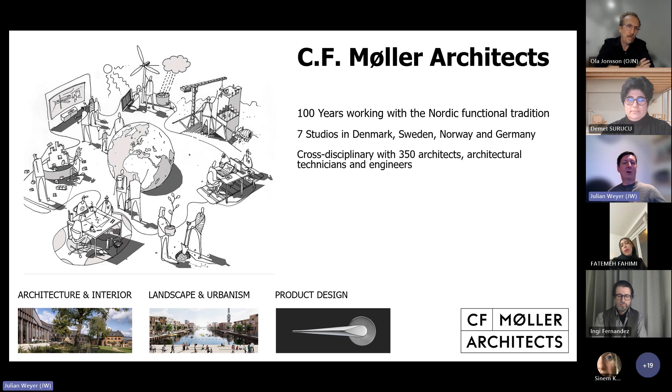One of the important points is that up until 60 or 70 years ago, we mostly built healthy buildings, and today we are transforming a lot of those buildings. They're not being demolished, they're being transformed. They can live on. And when they're transformed and reused, you find they are quite easy to work with. Post-war, new building materials started emerging and experimentation took place, which led to buildings that are today perhaps a bit more problematic. That goes hand in hand with the discussion of embodied carbon, which we'll come to in a minute, and that's been part of driving timber architecture emerging.

For our 100 years anniversary, we made a number of things. We made a movie, which you can see online, but we also made these centennial numbers, which pretty much tell the story from bricks in the 1920s, 30s and 40s to concrete in the post-war period, and today moving on into the timber revolution. A big part of that has been the fact that we work across Scandinavia. Originally a Danish office, we are now a pan-Scandinavian office, and that makes a big difference in where the influences of the architecture come from. Ola will get into that as well.

Looking back shortly at what happened in the Nordic countries: in the 1970s there was the oil crisis, which for the first time brought energy efficiency to the forefront in architecture. Then it was all about heating, so saving heating energy was the big thing. We came from an absurdly high level, looking at it today, in terms of how much energy buildings were using, but that was never put into question before. Then in the 2000s, there was a big focus on operational energy, especially electrical energy in buildings, and optimizing that.

And a lot of work was done in pushing that, squeezing the operational energy balance of buildings, and also really the heat savings that were able to achieve with the kind of approach that you find in passive house architecture, for instance. So all of that was embodied in building regulations in the Scandinavian countries throughout the 2000s. And that means that in a future scenario, so the 2020 scenario, we no longer have that much focus on the operational energy like the heating and the electricals, because that has been optimized to a degree where the last little percent of saving maybe doesn't make much sense.

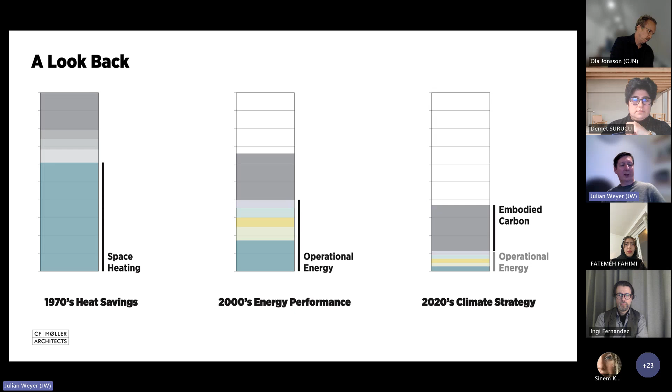Rather, what makes a difference now is this block which has just been sliding down the scale, which is the embodied carbon in the buildings. It used to be a smaller part compared to the energy that was used in buildings, but now it actually is the bigger part. So this is where our focus has shifted to. And if we look at that in the typical multi-story buildings, you'd see that the embodied carbon is way bigger than the actual energy use. And if we perform tweaks on the energy use, which we of course still do, we still try to optimize in every which way we can, it doesn't really bring the kind of savings that focusing on the embodied carbon does.

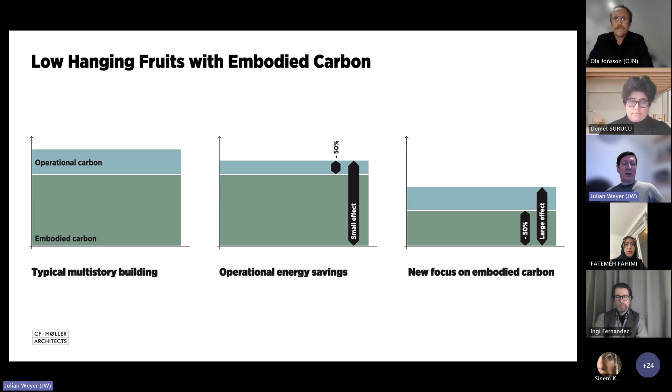So as a background, this is the logic which has been driving, for instance, the use of biogenic materials in architecture, especially in the Nordics. And this had to do with the fact also that we come from a tradition of building where prefabrication has played a big role for many, many years. And it's mentally, at least, an easy shift to go from prefabricated concrete panels to timber panels, for instance. Of course, technically, it's not always the same, but it's close at hand to make this transition because we're used to thinking in these modular ways.

And that leads to the Swedish perspective, because when this whole thing started, it was very much Sweden and Norway and Finland, the Nordic countries that have a big amount of forestry, which were drivers in the first push for change in this. And this resulted, for instance, in research collaborations, which Ola can talk more about, where we went into partnership with other companies and institutions and universities as well in trying to develop these concepts to be able to bring them to the market.

Yeah, shortly, Sweden has a long tradition of building in timber, and I'll get back to that as well. But the research project actually started out with a need for a change in how to use our timber in Sweden, and the union for timber was looking for new challenges and new jobs, and then that set off a discussion, and that ended up in a research project with Vinnova, which is a finance center for research, and Linnaeus University revised the academic level of it. So that's the research project that we finished a few years ago.

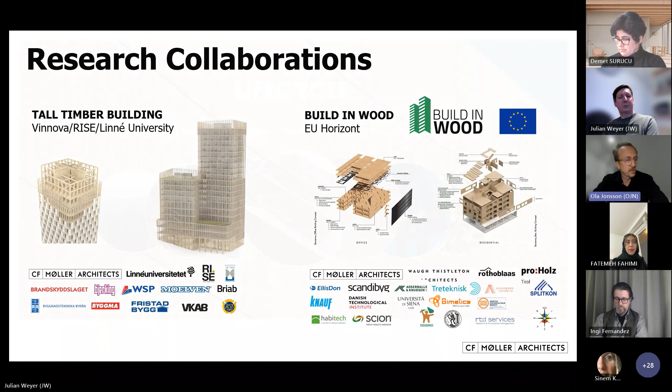At the moment, we're involved in another much larger research project together with other colleagues around Europe, and it has quite a technical aspect to it, and it's financed by the European Union's Horizon. It's a 10 million euro research project, so it will be presented quite soon, I think, at the end of that. But the purpose was to find common ways of using the Eurocodes to build all over Europe.

But basically, the most important thing about building in timber, in my perspective, has been that it has a life cycle. It's a circular means of building, especially in Sweden, where we have a large degree of woods. You take the timber and you build housing or offices or whatever you want to build, and try to build them with great quality so that they will sustain over a long time, with the embodied carbon. And then after hundreds of years, hopefully, we can transform it into a new building type.

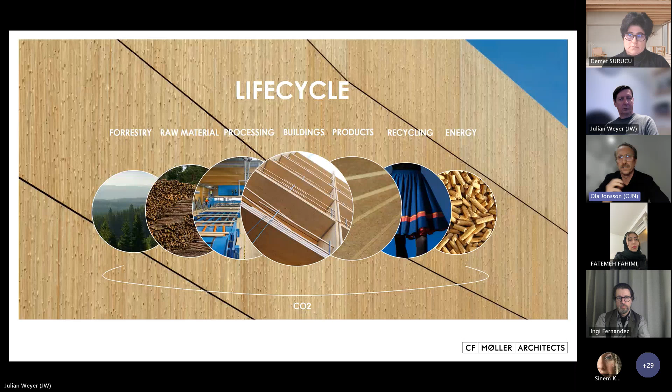We can take it apart and make new buildings, or we can make simple building materials, or other organic materials like textiles or anything else. And then in the end, it will be either burned or go back to biomass. And that just says that the carbon that the woods take from the atmosphere is borrowed and then handed back to the atmosphere again. So it's the same carbon that circulates around instead of creating new. So that was, for me, the main reason to work like this.

Sweden or Scandinavia, depending on how you see it, consists of about 70% forest, and a great deal of that is sustainable forestry, which means if you take down a tree, you replace it with two or three new ones. But there's a lot of research and science connected to really doing it in a sustainable way, and it's developing. You can take the next one.

And engineered wood or timber is many different things. CLT is the most commonly talked about today, but there are so many different versions of it that we work with in different timber hybrids, and it just has some of the best qualities. Of course there is the lightweight and the environmental part, but it's a really easy, industrial material to work with. You can get really high precision and a linear building process. We can continue. We have so many pictures, so I have to go really fast.

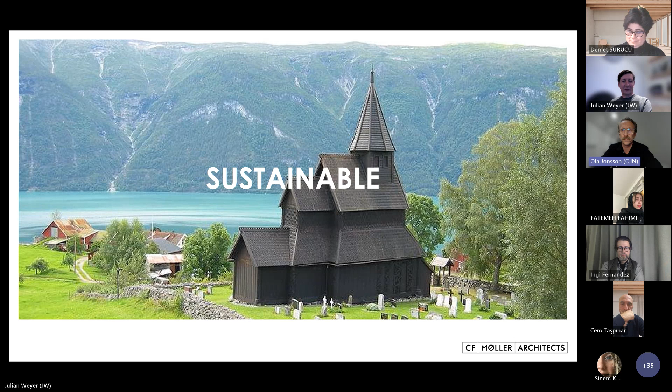Sometimes we have critics that say timber is not long lasting, but we have proof in Scandinavia and Turkey and other countries. If you just do it in the right way, you can actually have buildings that stay for a very long time. This is a stavkirke, a stave church in Norway. It's been around since the 1100s, and it's still standing.

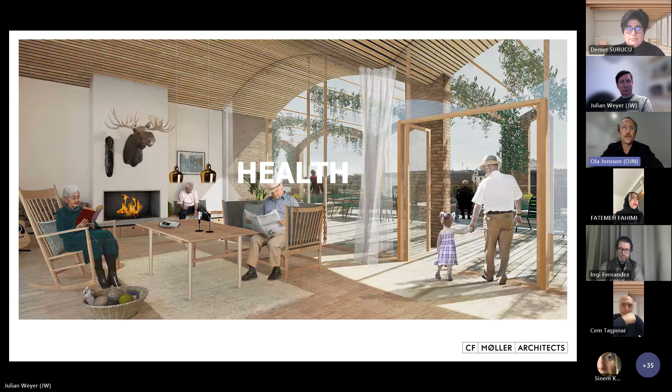One of the things that came up, not from the beginning: when I started 15 years ago, there was not much discussion about health, but evidence-based research now shows that it has a great effect on humans, both including it in the structure, which affects the climate and the acoustics and so on, but also visually. There are several reports that show that, for example, in hospitals or elderly homes, people become healthier quickly compared to other types of buildings. And I think that's one of the main things we try to work with in all our design.

I think we have matured a bit as well. We started out talking a lot about buildings, this building and this building, but the main concept is to change our cities from producing carbon dioxide to actually absorbing carbon dioxide, and so when we brag about making tall buildings, that's in reality not so interesting. It's about the critical mass of our cities and how we plan them. Yeah.

And this is my little slogan, but in general, I work more and more with hybrid buildings, and the best material is not timber. The best material is the one that we're not using. So we have really advanced simulation and digital tools today that can actually show evidence of the smartest way of making our buildings. And it's not always timber. Sometimes it's timber-concrete or timber-steel. But the base, the beginning of the talk, is always how much timber we can use percentage-wise.

And I throw in a little quiz. I used this in a presentation recently in Sweden, so this is a bit different. But do you know what the largest timber building in Sweden is? So this is a question for you guys. Have you ever been to Stockholm? No. Yes, but yeah. You don't know the answer? Yeah.

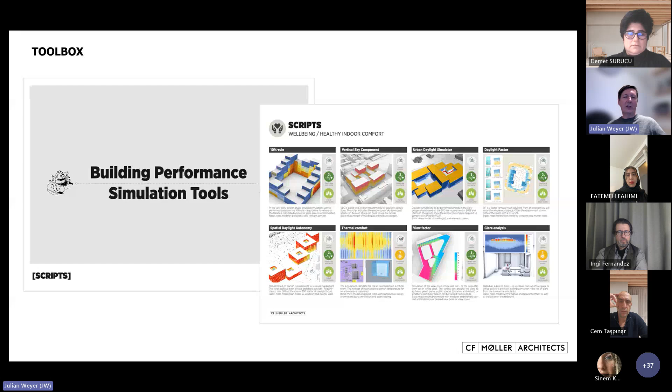And there's been some recent developments, which I'll come into in a minute, which are quite interesting in pushing these agendas. We have over the years developed particular scripts and tools which are used for initial assessment in the sketching phase of daylight, of microclimate, of overheating, all of these different parameters that can be studied in models from an early stage on. But what happens now is that LCA comes to the forefront. So life cycle analysis is now part of mandatory building regulation requirements.

And this is an interesting change, and I think the Nordic countries are the first to have made this move. I would expect this to happen in more countries over the years, but of course the question is how fast will it be? So in Sweden, Norway, and Denmark, we now have climate regulations as part of our building code, and that means that there are caps on the embodied carbon. You can only use so much. And in Denmark, we did it in the same way as it was done 20 years ago when it was about energy savings in operational energy.

We started out with a building code which was tightened every 2 years and stepped down. So the top curve would show you what would be the mandatory requirements coming for the next year. So for 25, 27, and 29, you'd have tightening of building codes. Earlier on, it was operational energy. Now it is embodied carbon. So these numbers here, 12 down to 7.5, are kilograms of CO2 equivalent per square meter per year.

Underneath that, the lighter line is the voluntary emission class, which was always an offer to say, let's do an experimental emission class where more ambitious builders, architects and designers can try and meet tightened regulations. Now, what we know from the 2000s, when it was operational energy, is that the plan is always to, at some point, skip the top line and go to the bottom line. As soon as it's been proven by the first projects that you can achieve these kinds of savings, the mandatory top line actually moves down and the voluntary class becomes the mandatory class.

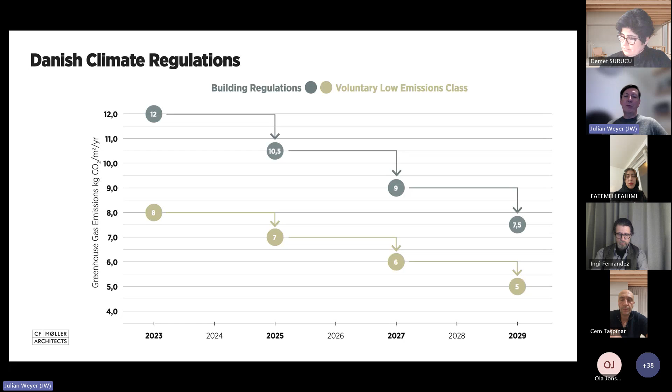And this happened already before the first 2 years were gone. We now actually only have the lower line as building regulations for the future. So that means that we are looking at a quite ambitious transition. We can't really build as usual anymore. So classical business as usual is out of the question. We now have to think about materiality as a key forefront. And this goes together with the whole EU taxonomy, which also plays a role in this. I'm not going into this in detail, but it's certainly something that affects the way that we build.

So first off, we've used the LCA data we have to create a carbon construction catalog, really, which is a base that we can use when we design buildings. We have different build-ups and wall typologies, etc., and we know what the LCA data are for each one, because we have to make these informed decisions very, very early.

And we've also developed scripts, because with this kind of graphic, you usually see that together with BIM or other complex project management where you say, well, in the beginning, there's a large possibility for change because you're at an idea stage. And as soon as the idea becomes more and more concrete, the window for change becomes smaller. And in the end, change is detrimental in a project which is already in the advanced stages. So that becomes tremendously costly.

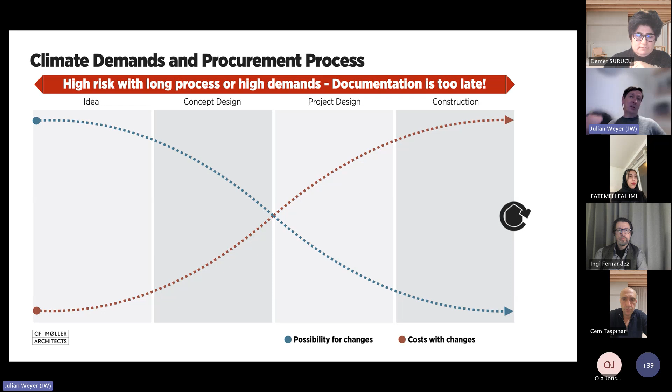Now, the problem is, as I just showed you, we project carbon values into the future. So if you want to make a building application in 2 or 3 years' time, it's not necessarily the same values as today. So we have to have tools that can tell us continuously throughout the design process, where are we in terms of embodied carbon, and are we meeting the targets?

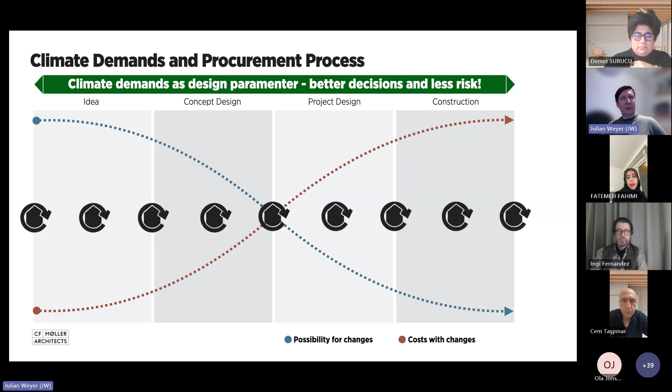Are we meeting the future targets that we have to amend to? So we need to look at these values and these data before we actually have a full building model that can give us that kind of info. So those projects I've worked on BIM, and of course, if we have a fully fitted out BIM model with all the data and the materiality, then you can make LCA calculations.

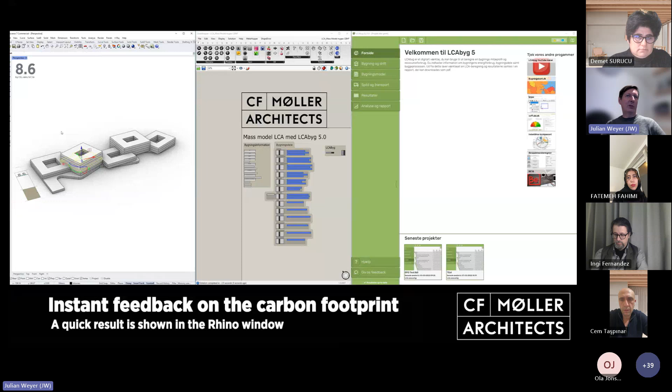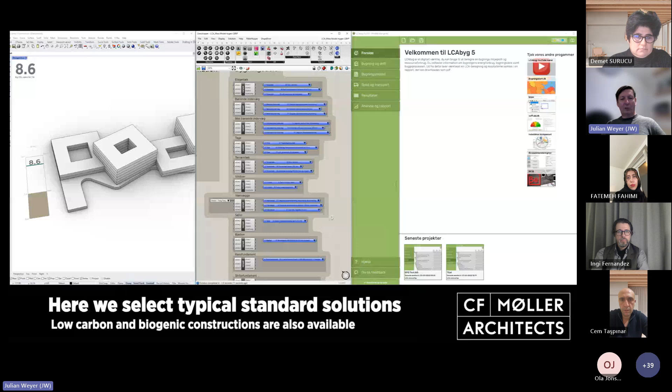But what about the early stages? So I show you here an example of what it looks like, the tool that we've developed that ties in together with the LCA calculation tools that are used to assess these values, and what that looks like on an early stage model. And this is a model that has absolutely no data on materials. So the only thing we can do is work with probabilities. So we can say, typical type of construction, what kind of LCA would that be? In this case here, you'd say standard solutions. That's what the contractor would use if we didn't make any particular specifications.

And then we can generate an early LCA file, and we can see, well, where do we end up down the line? If we have the building application in 3 years, are we still making the cut? Are we still meeting the requirements? And this data can be imported automatically, and the LCA calculation tool is an open source tool which is used all across the country and is available for everyone to use, based on a shared knowledge database. And when you see that you can't actually make the requirements, then we can change and implement more biogenic constructions. And this is really the key point.

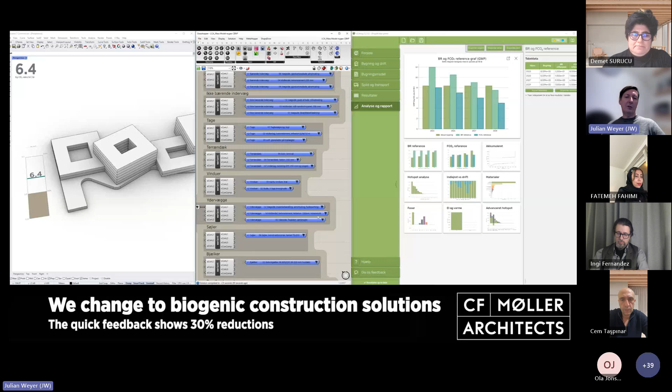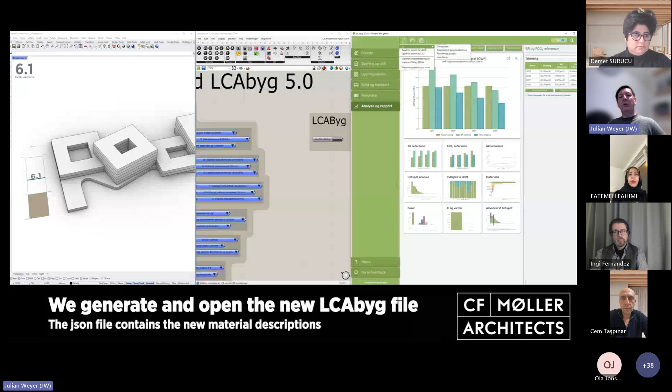We have this early on informed conversation with clients about if a particular building typology or size or dimensions, if we want to implement that into the future requirements, we need to look at the materiality just as an equal thing together with all the other parameters that we are looking at. And here, in this case, we can say, well, that kind of volumetry, that kind of building will actually achieve the LCA values and can keep below that if we use a certain amount of biogenic materials. So this is a way of approaching the fact that we don't really know yet in an early stage what we're going to do, but we still have to make assessments where we will end up.

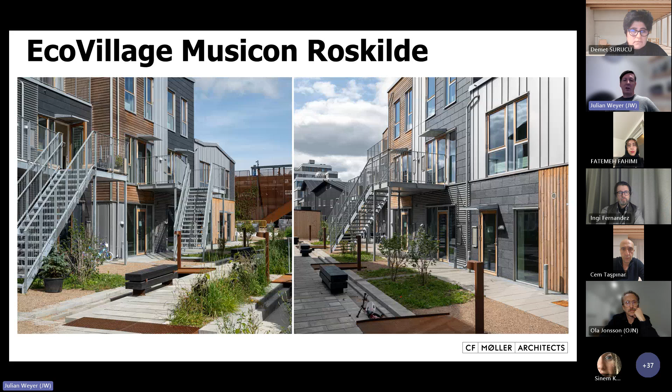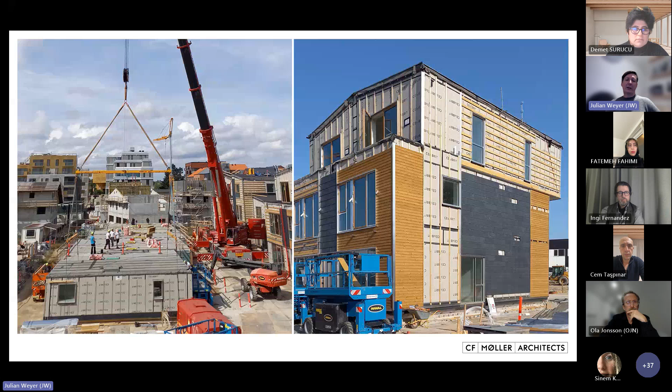And when you talk about these values that we are looking at in the future here, in 1 year, we are looking at 7 kilos CO2 equivalent per square meter per year, and that will drop further down to 5. What does that actually look like? And this is just an example here, a residential project, which is a completely modular timber construction, no elevators, no concrete, no cores in this building. It's made from entirely prefabricated modules, so it's put on site on a simple concrete slab, and otherwise everything else is either biogenic or recycled material or leftover materials.

And this is an aesthetic that I don't think every single building in Scandinavia will look like in the future, but this is certainly something you'd have to understand. This can go by about 6 kilos CO2 equivalent per square meter per year. So it's well within the range of permissible values, but it also shows you that if you were to make a basement here, or if we had a big lift core or something, already then we'd see issues with reaching the targets. And then there's the question, what comes beyond this?

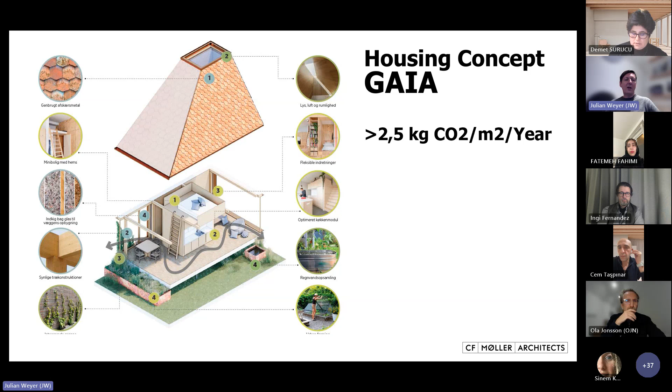So we did a competition/research project, which looked at the possibility of going way below those targets and going down to less than 2.5 kilos CO2 equivalent per square meter per year, something which is extremely ambitious in a building perspective. And the idea here was to say what kind of architecture, what kind of living could be an approach to reaching this. So again, it's probably not the solution for the future, and not everything's going to look like this, but it's an example of how much it actually takes to reach those targets.

And in this case, the target would be going from this roughly 4 times planetary boundaries consumption that we have today down to being within planetary boundaries, and then actually looking at what it takes to go below that and down to truly net zero. The definition of net zero is a very tricky issue, but if we want to say that you're 100% climate neutral, we need to go below the planetary boundaries.

So starting up at the top, business as usual is where we are today, and that's not even all bad in the Scandinavian countries. And then using timber construction, using bio-based materials and circular building and all the energy savings we're doing, we can push the envelope down from about 10 average kilograms of CO2 down to 2.3. So there we are technically within the boundaries, which is about 2.5 level.

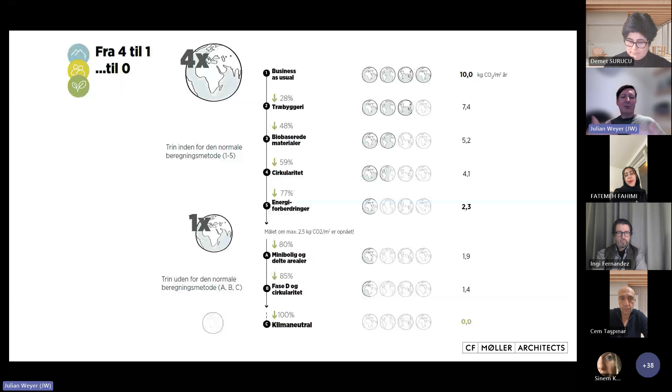Then if we want to go further down, we have to start looking at the areas and the volumes we're building, and we have to look at reusing our materials another way than, for instance, just burning timber. And that can then give us the opportunity of coming all the way down. So as an example here, this building system employed 78% bio-based materials, and the rest would be recycled materials, for instance, metal sheeting and that kind of thing, in order to get down to these super ambitious energy values.

But we were also looking at the fact that this was a housing concept. We're also looking at the fact that we need to actually make the units smaller. So Denmark, I think, has a record for most square meters per person in residential in the world, and that's just not sustainable in the long term. So we have to also look at that, use more shared areas and communal facilities, and then optimize area like that. So this is, again, an illustrational example of what it would take to get all the way down there.

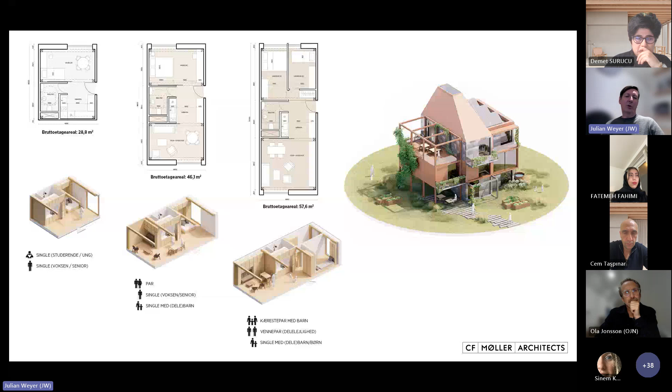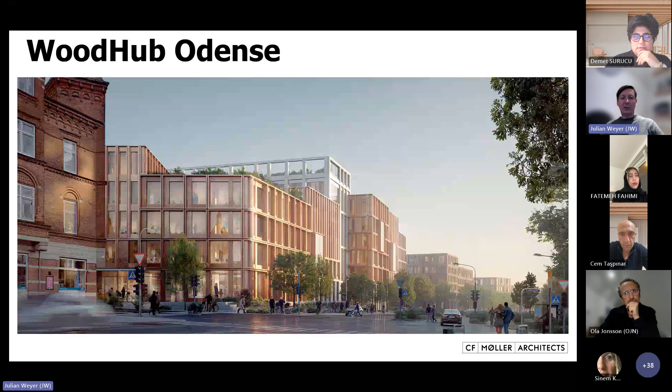But bringing that up into the big scale and showing how we can work with the larger buildings, that's where the timber construction comes into practical play. One project that we are working with right now, which is completing soon, is Denmark's really first large-scale timber building, a government office hub, which is built in the town of Odense, where the idea was already to work with a modular architecture which could adapt to timber construction, but also could adapt to the urban situation.

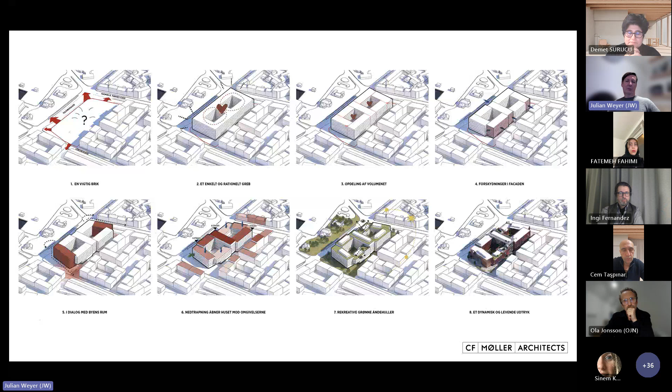So we had a whole series of diagrams here which show that we optimize the volume or create a large volume. In this case, it's a fairly efficient building, actually. It makes the most of the site and the space there. But the idea is to also work with it in such a way that it creates a good urban environment, a good microclimate, enhances the greenery on the site, and in the end still works for rationalized timber construction.

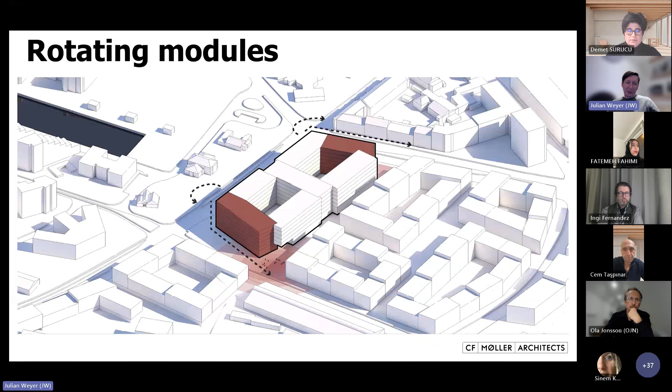So that means that we are looking at dividing the volumes, breaking down the scales, bringing in the edges of the city, adapting to the context in terms of heights, and then use the daylight to shade the building and use the roof terraces, activate the roofs, and then using architectural design of facades, different variations to blend in with the surroundings. So all of that becomes the language of the building here.

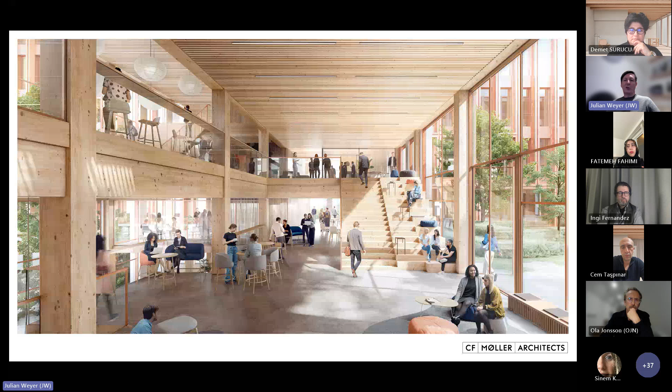And it's a project, as I say, about to complete, and it is a very simple structure in a way. It also has a high degree of timber compared to the modularity of other structures. It's a very, very simple construction, and it was part of the thinking here that because we also have to think beyond the use that the building has right now, we need to project where we're going to be in 50 years' time and how the building can be reused.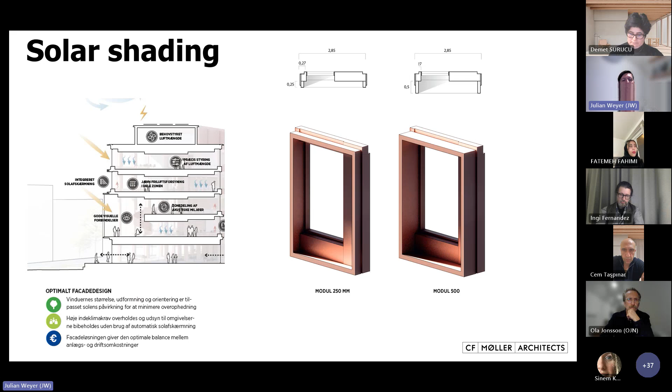So we have a simple passive design where solar shading is already integrated in the facade, so we can do without external sunscreens. And then we have very, very simple column and slab construction, which gives us a high degree of freedom when it comes to the use of the building in future perspectives, because there are no beams or downstands or upstands that limit the use. It's a very simple sort of shelf-like system, which means that we actually have a large range of adaptations.

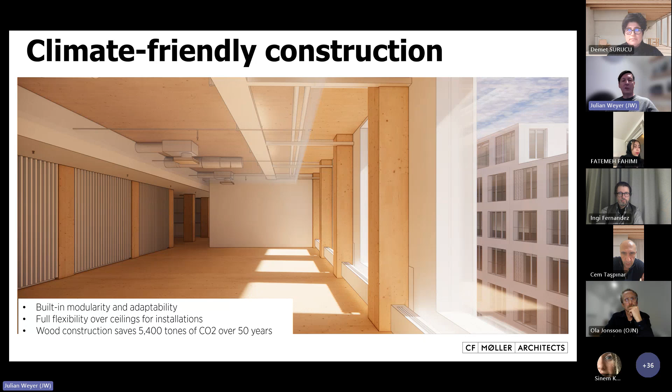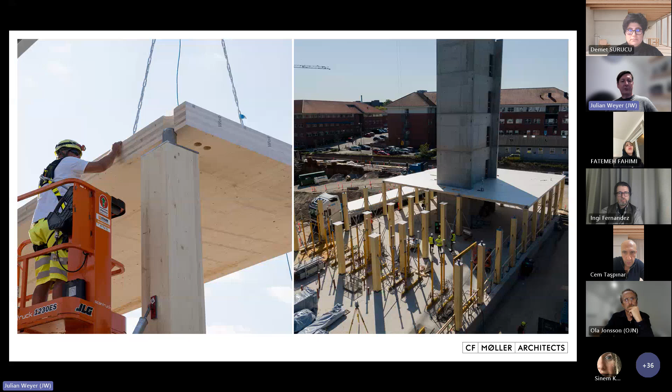It can be transformed in future scenarios, and it has a high flexibility in terms of what kind of installations, whether it needs ventilation, for instance, or not. All of this is adaptable. And on site, it's really a simple construction as well. As you can see, it's timber columns, timber slabs, and then only point-wise concrete cores, which is the hybrid component here. And that's then covered in a recycled aluminum facade with this solar shading efficiency.

And a lot of actually quite beautiful details can come out of that, and the whole timber atmosphere on the inside, as Ola was talking about, is certainly also something to do with the healthiness of the work environment.

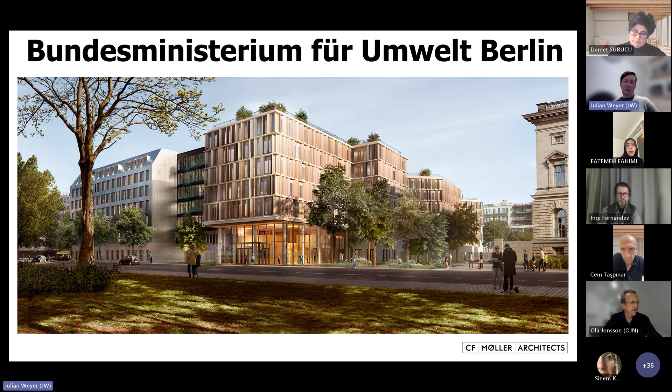And one step further is a project we're doing in Berlin, which is the Ministry for the Environment, the German Ministry for the Environment. It's just sitting right next to the Parliament of Berlin, and a tricky site and a tricky building because it's supposed to be a showcase for circular and low-tech construction in Germany.

A sustainable approach. And what we found is that we are in an urban environment where if we want low tech, which means in this case no ventilation system in the offices, just natural ventilation by opening the windows, first off, we have to look at what kind of urban environment is on the outside. And we find that it's not very green. So the idea was first to create a green island. So if you actually open your window, it's into a pleasant microclimate and not a busy big city.

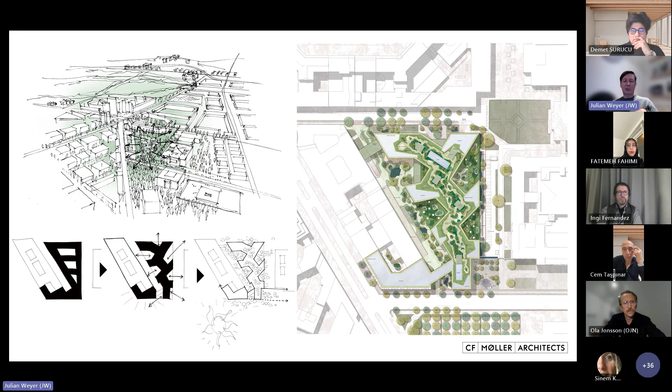And the next thing being that if we want to make a low-tech building, we can't do an introvert building. So we can't have something which is closed in on itself. We need something that is extrovert and outward looking. And this ended up in this kind of strange structure, which looks almost like a tree, which is unintentional in terms of design, but it works brilliantly because this is open to all sides for daylight and for natural airflow.

And then combine that with a building where the facades change depending on the amount of sunlight they get. So higher up, actually, the facade openings are smaller, lower down, they grow larger. So it's a very sort of organic expression of the situation the building is in.

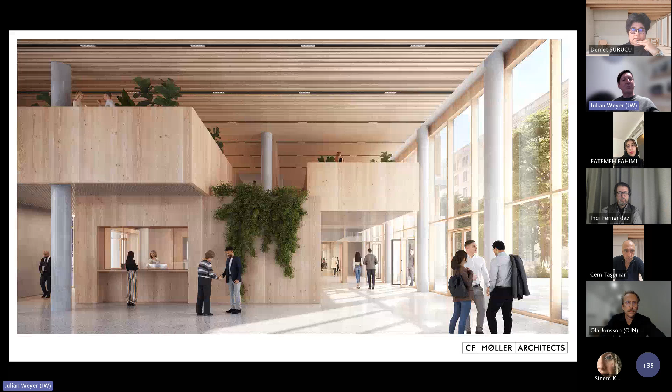And this is then combined with thousands of singular offices in there, plus some communal office space, but then also particular spaces like lobbies, foyers, exhibition rooms, etc., which make up a special atmosphere and where we use the timber construction also to, in this case, create a dramatic ceiling in a lecture hall or have a vertical atrium that bisects the building. All of this is something where the timber comes into play.

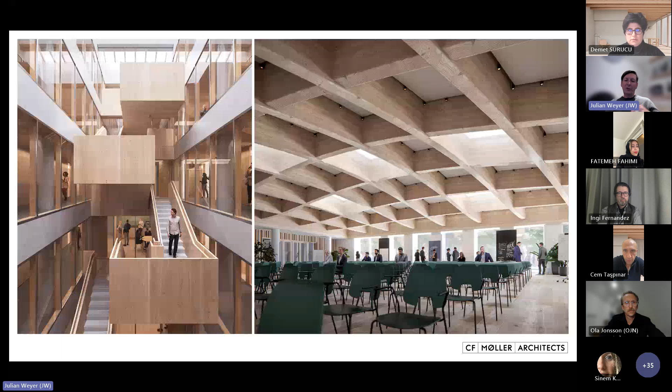And then we have to project the climate data. So Berlin, which today already has pretty hot summers, in the future will have a climate which is more akin to Rome or Istanbul probably. And therefore, we also have to look at the projections in the future scenario. And again, there's no cooling, there's no air conditioning, there's no ventilation here.

So what we rely on is that we have a simple ceiling fan, and then we use clay in the building. So clay as a material for partition walls, for instance, means that we have a 2-degree lower room temperature because of the retarding quality of the clay in terms of adaptation or change in room temperature. We use the night cooling, so simply opening the window and leaving it open at night will cool down the building, and the clay will postpone the reheating. So it's sort of small tweaks which make that difference.

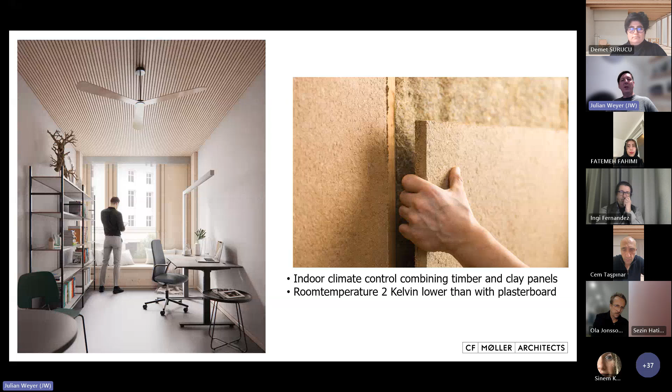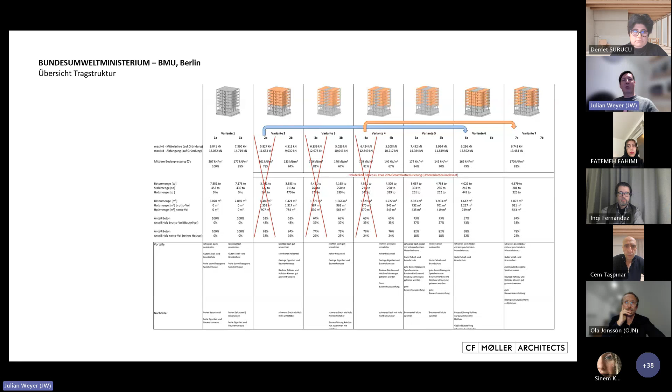Here, for instance, we wanted a lot of green on the roof, and heavy loads from that mean that we have a concrete core and then we have timber slabs on the outside. And again, with the timber slabs, we also looked at all sorts of different variations and looked at their different build-ups and always compared that to a standard concrete construction, as any contractor would do it.

And then we looked at the individual quality of the timber slabs and found that actually one model which worked quite well is one that is very akin to, as I said earlier, we're looking back to buildings which are now 80 to 90 years old and are super healthy buildings.

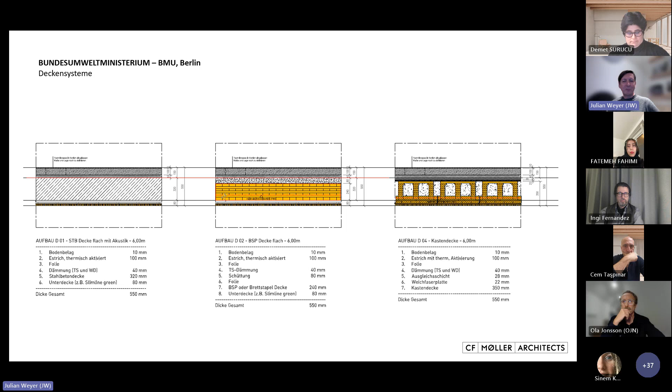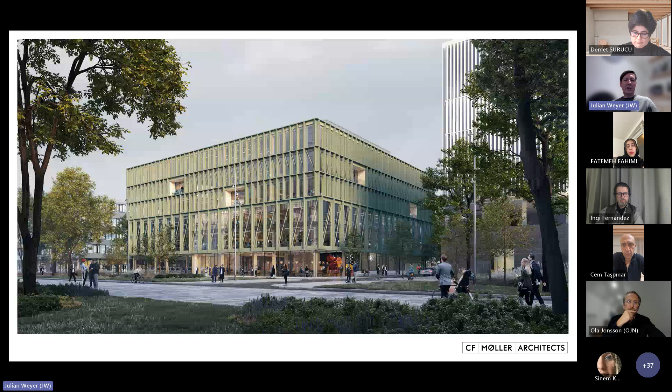And another project that we're doing right now in Germany, also completing, is in Munich, a large-scale office building there, which is a market rental building. And therefore, this is divided into smaller units. It's derived in very much the same logic as the project I showed you in Odense, so that we have a number of buildings tied together by an atrium on the inside and a simple, efficient floor plan. And then these adaptations to context, which mean that it makes sense in its overall setting.

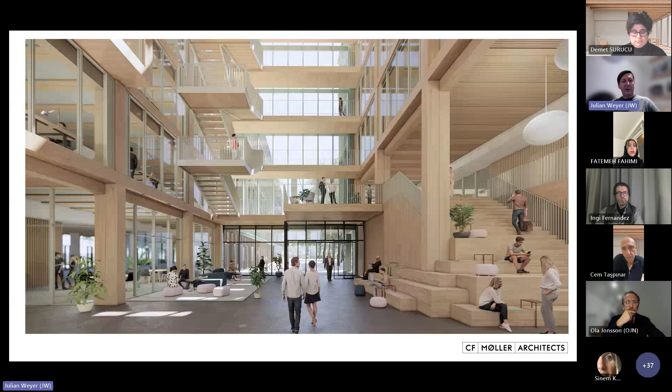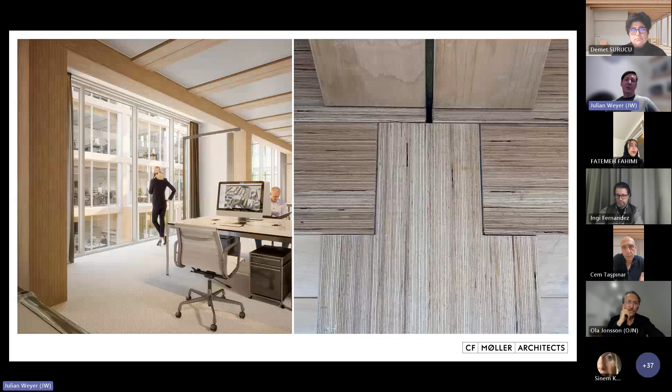And here we're looking at using the timber in a very visible way on the inside to have a really true timber atmosphere, because it has a fantastic value, as you heard. It creates something special in terms of the feel and look of the building. And here on the left is a render of the offices, and on the right that's actually a shot from the mock-ups that were done on the building site.

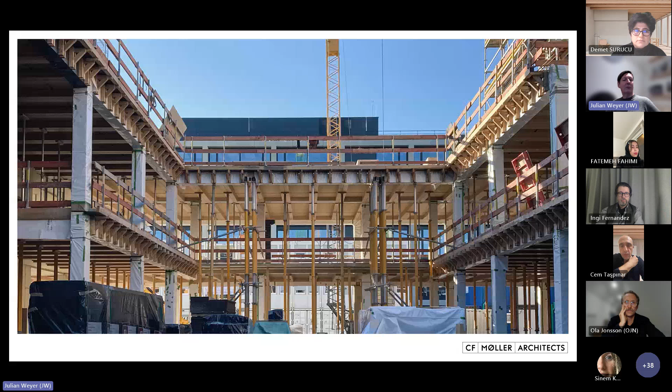Here we are using beech wood. So this is not a CLT, but basically plywood of beech, which has a high tensile strength. And therefore, we can do a beam construction here, which has much larger spans and different properties. And we looked again at optimizing the different slabs in terms of having these larger spans, creating more freedom in the floor plate. And this is what it looks like in construction. You can already see that there's this ribbed structure underneath the slab here and relatively few columns, long spans.

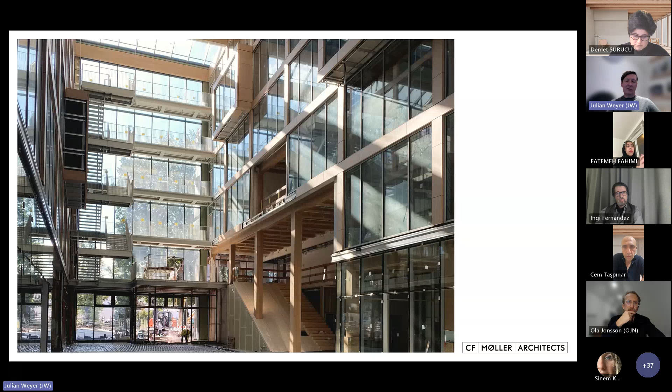And in detail, how this feels, and again, it will be visible. So it becomes part of the interior design. And this is a very recent image from the construction site, it'll be completing early next year, where you can see the timber on the inside. There'll be this large sitting stairs coming down. And so it's going to be quite a special atmosphere, this building.

And the last project in Germany that we're working on right now as well, also under construction, is a school. And it's interesting because timber in schools can also play an important role. We were looking to design a different kind of school, actually a Scandinavian-inspired school in a German design setting. Most German schools, I'd say, are a little bit old-fashioned, whereas there is a real interest in trying to push for new ways of looking at schools.

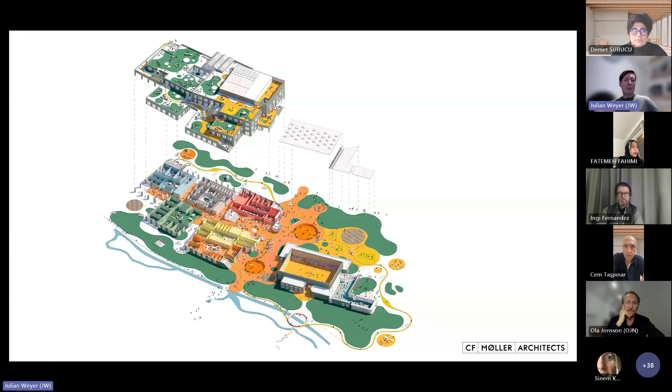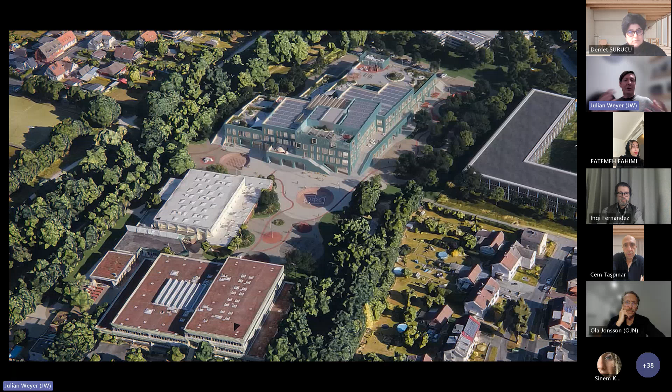And this is an example of trying to think differently about how the school design can be, using an atrium on the inside, for instance, to activate all areas at once and create something which, seen from the top here, is pretty much a build-up of different terraces, which can be used both for play but also for educational purposes. So every level of the school has access to the outdoors, and the whole thing is surrounded by a large park, which is also a public setting. So the school is actually part of enhancing the quality of the surrounding city and the urban areas.

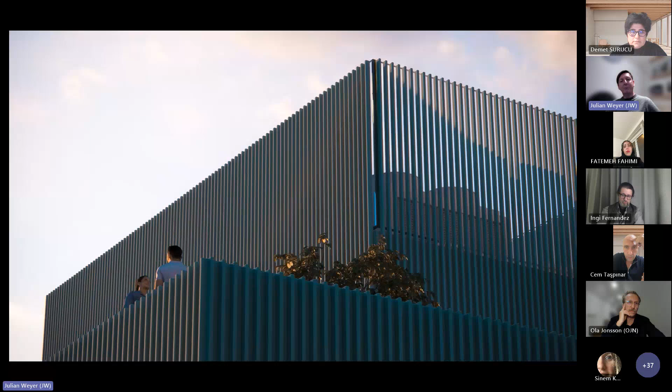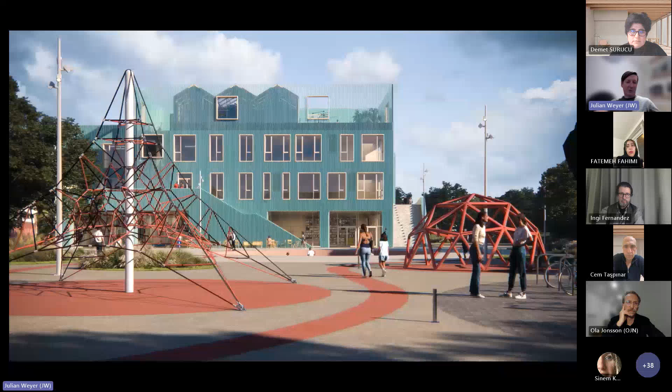And it's been the idea to put a lot of functions on the ground floor, which are not just for the school itself, but can be used by others. And together with this outdoor landscape where it can interact inside out, that creates a new kind of situation. A lot of Scandinavian schools already employ this thinking, but in Germany, it's not that common to have those shared facilities like this. So just as it's setting an example for sustainable construction, it's also pushing the envelope for how schools can work.

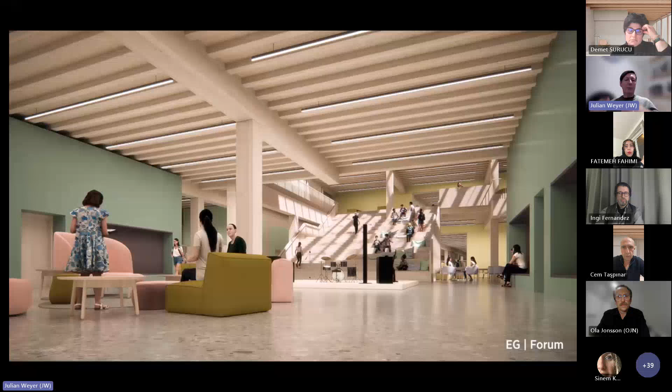And on the inside, you have sort of a street running through with library and music center and youth center and a lot of other functions which are already pre-thought to be used, not just by the school, but by the city. And then it sort of draws you all the way through. And we have this atrium opening up in the middle, creating a forum area where everyone can come together. There's the possibility to have events there.

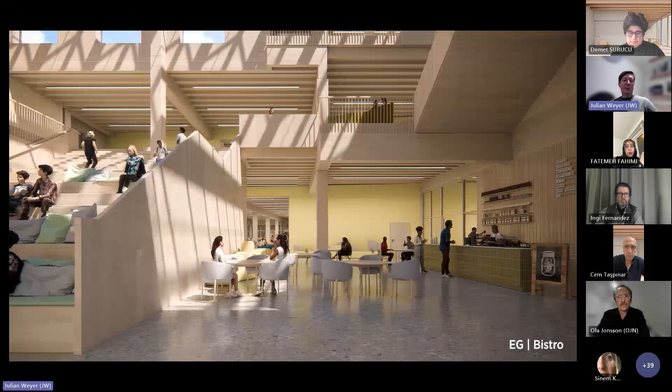We have canteen and cafe alongside the school. And we're actually looking also to open some, for instance, here the science clusters would no longer be closed rooms, but this would actually be open rooms which join this open space and create visibility for what's going on in the school. And you can see all of this is combined with a highly visible timber construction.

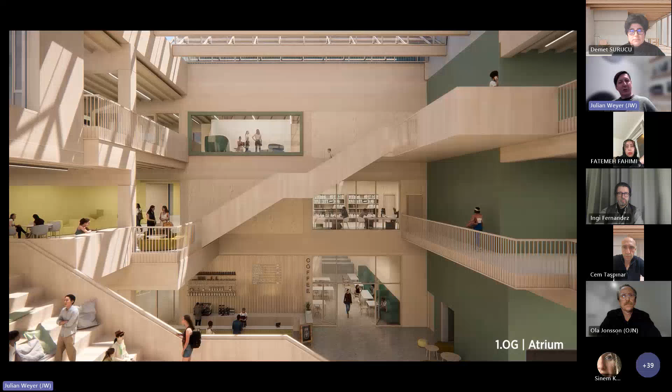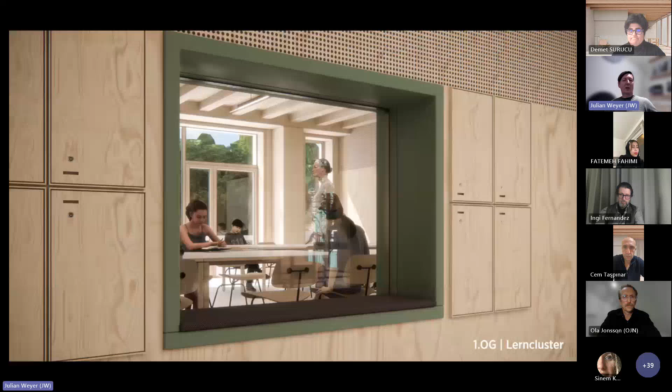So this is one of the key things of the school: you'll have visible use of timber, with that indoor atmosphere and the acoustics and the warm feel that it gives. And in the individual areas, it's not really classrooms, it's more like teaching areas. You'll see that also here timber plays a big role.

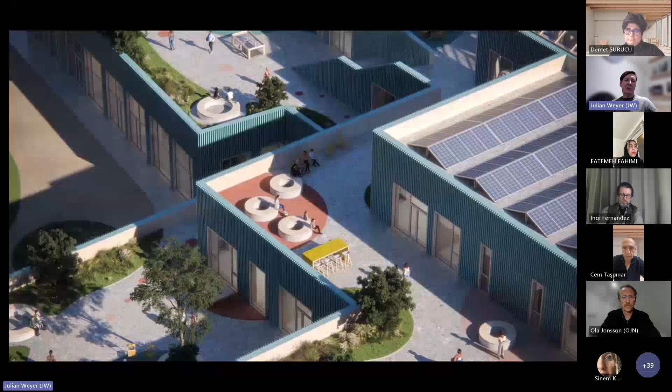So this was one of the key points of saying we also here work with a concept with a low level of technicality, sustainable materials and circular concepts. We're making material passports of everything that's used in this building, so that in the future you can tell exactly what the building contains, what it's made of, and what the purpose or reusability of every single material is.

And this combines into this sort of unusual school architecture, which translates directly into the timber construction. Again, here you can see there are a few concrete cores, and then the outdoor stairs, which are part of the fire escapes, are in concrete, but everything else is really timber.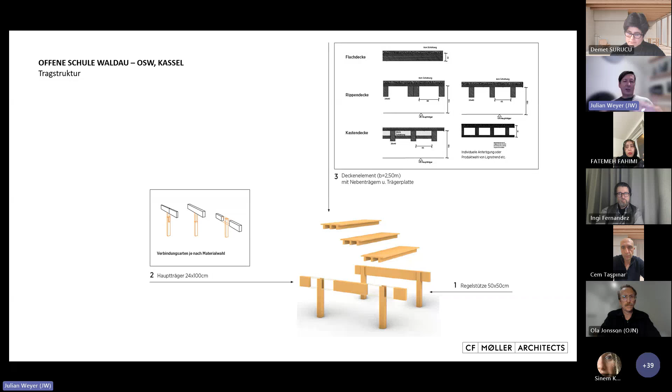And the timber construction, again, was worked out with the thinking of what happens in future adaptations. We might not put a lot of technical installations in right now, but there should be possibilities to fit that in future scenarios and use this timber construction in a quite simple modular way, even though the school has some odd shapes. And as you saw in the movie, this route running through here ties the different uses together.

And inside each teaching room, we also use the timber in such a way that you have the opportunity, for instance, to hang stuff from the beams. So you can literally reshape the classroom in a three-dimensional way, both in terms of lighting, but it could also be different aggregates, or even furniture that's suspended from the ceilings, trying to activate the whole space. So everything we did here was always with the thought of how that creates value in the day-to-day life of the school and in the life of the pupils.

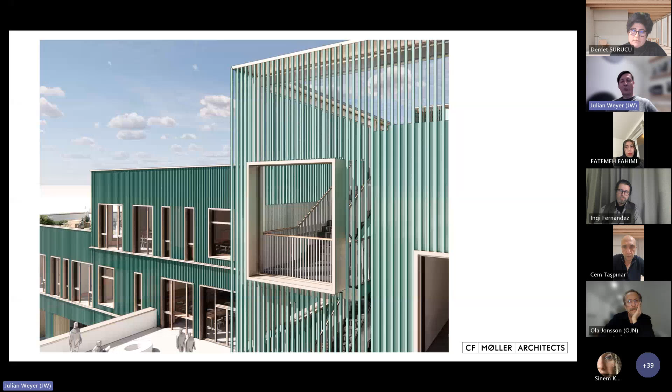And because it has the sustainability goals, we are also looking to do a timber facade. So the entire school will be clad in prefabricated facade modules with a timber cladding as well. So it's really a highly sustainable material palette, and everything, as I said, is pre-screened for environmental healthiness, and then it's also registered in material passports, which means that we have a full register of everything that's in there. So those were a few of the German projects that we're working on at the moment.

And then Ola, you have also a portfolio of what's going on in Sweden right now. Yeah, I'll keep it quite short. There's a few Swedish projects going on at the moment, and this is actually going to be announced in a few days, so this is pre-hand information. It was a competition that we won this summer for a new university building in central Malmö.

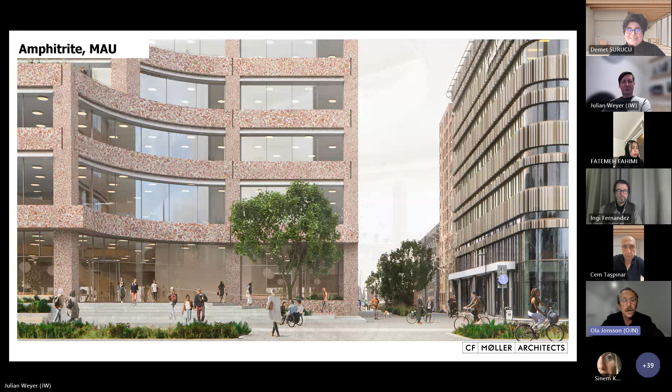It's a 20,000 square meter building, and it's going to be a hybrid. This is what I think is really fascinating about working with this now. There's so many versions of hybrids, and this version is timber pillars with beams, and then hollow-core concrete slabs, which makes it possible to have a really flexible floor plan with fewer pillars. And just the same as Julian told, we want to integrate the structure as part of the design and the feeling of the building.

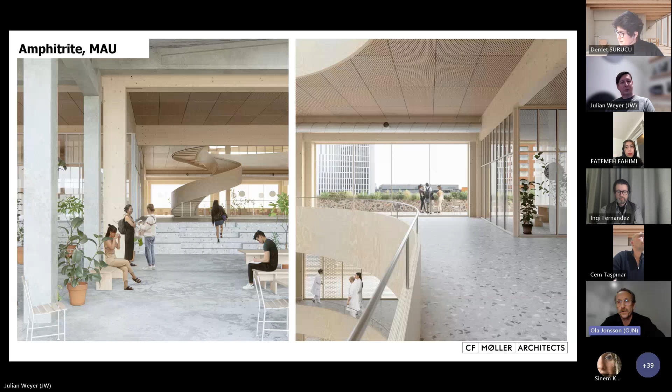And this building is also joined with the transformation of an old historic magazine building down at the harbor in the city. So there was this interaction between transformation and renovation of an old building included in the design, and then with a clean cut, you go into the new building with a new, industrial way of building.

And this is another project also in Malmö. It's called Hyllie Play. It's an office building. It had a triangular local plan that we had to adapt to, and we were a bit worried about that. But actually, we found a system within the system for this as well. It has the same kind of hybrid with concrete slabs and timber pillars and beams.

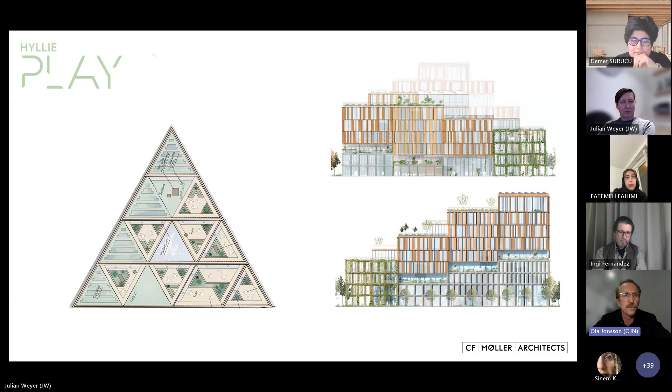And it has quite a strong character in its silhouette as well. So it's just another hybrid building, but it has a lot of ideas. It's called Play for a reason. It's all about activity and health. So there's a sports hall inside and so on for the people working in the building. You can go to the next one.

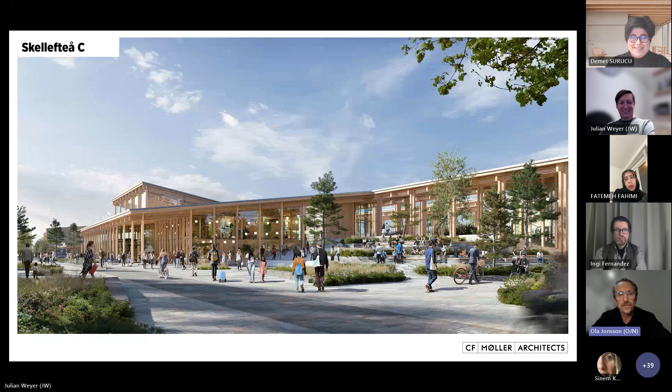This is a new train station and bus station in the very north of Sweden, entirely made of timber. It's a project we're working on right now, and it's quite a large timber structure, but in one floor, so it's spreading out. So it doesn't have to take a lot of weight. So therefore, we can do it entirely in timber as well. There's a cross section, just showing how it works with the landscaping as well.

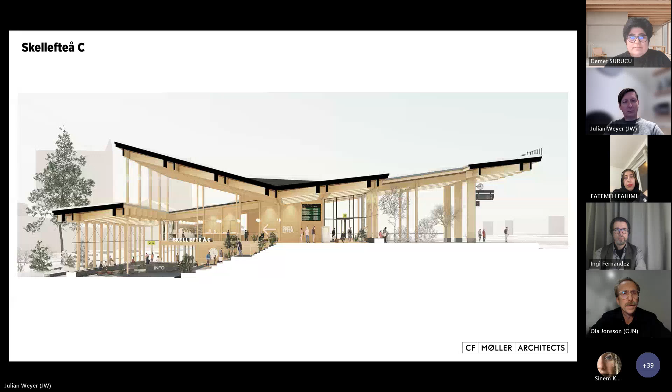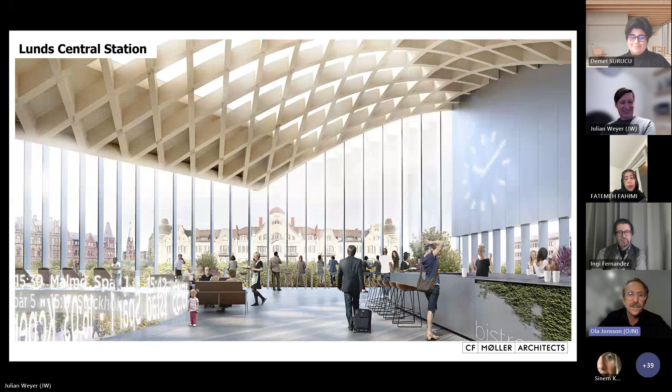I don't know if there's a section. This is an interior image that's showing how timber can be part of that design. This has very high security measures because of the train, so the slab is made in thick concrete, unfortunately. It has to take explosions and so on, but it has the character of a timber building.

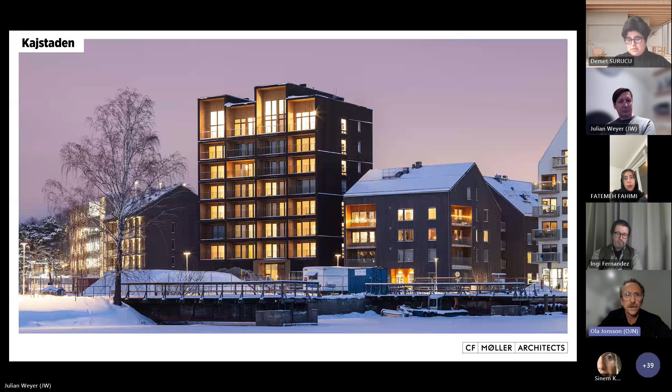This is one of the first pure timber buildings that we did. It was a housing project, and at the time, the tallest timber building in Sweden. It's not 10 years, but almost. It was never built this high ever, so it was sort of an experiment, and we decided that everything should be in timber, so floor slabs and walls, balconies, elevator shafts, everything is entirely made out of timber.

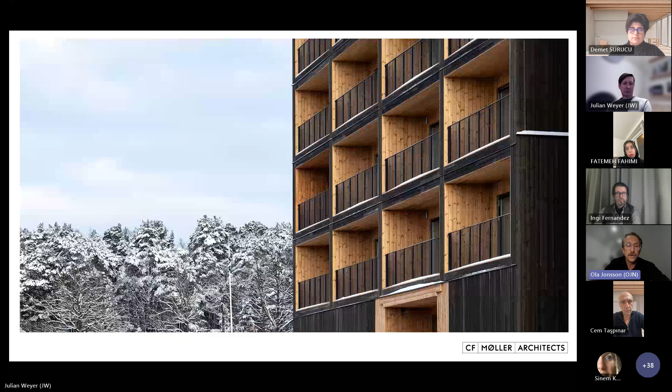And it was quite interesting to see when it was erected. There were 3 guys, about 20 years old, who built the whole building with a crane, and it went really, really quick. And this is a residential building which is fully working now, and everybody seems to be happy about it. And of course, it has a really low carbon impact. And this is another image in the winter. It's standing in Västerås, a small city in Sweden.

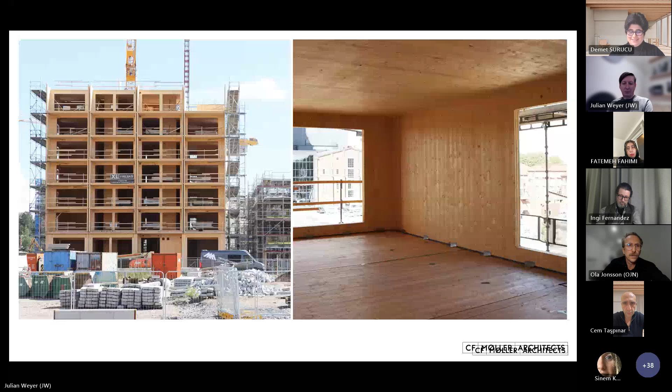So just some detailing from the elevator shaft and some electrical preparations. And also when you work with these telescopic connections between parts that will move or compress differently. And then just zoom in on a floor slab and wall connection right there. You can take the next one.

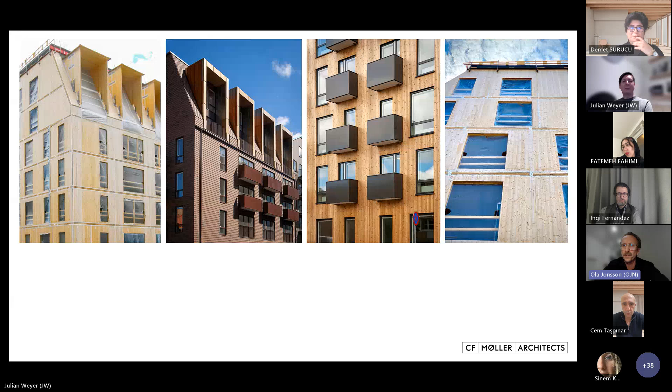Another housing project outside of Stockholm, made from CLT entirely, and it's a rental housing project. It was finished a year and a half ago or something like that, and it seems to work as well right now. Can take the next one. I think that's it. Okay. Good.

So there's time for questions. Okay, thank you very much, Ola. Thank you very much, Julian, for the detailed and informative projects presentation, because we've seen many different functions like school buildings, housing projects, and central station projects. We've seen projects from Munich, Berlin, and Malmö, European cities. Thank you very much for the projects and for your presentation once again. You're welcome. Maybe our students or academicians can ask some questions.

Yes, Aisha, I think you have a question. You can open your camera and ask your question directly, okay? Yes, hello. First of all, thank you very much. It was very nice to get up-to-date architectural information. Because I'm from Ukraine, and in Ukrainian universities we don't study so much about contemporary techniques and contemporary materials. So it's really valuable for me to hear all of this.